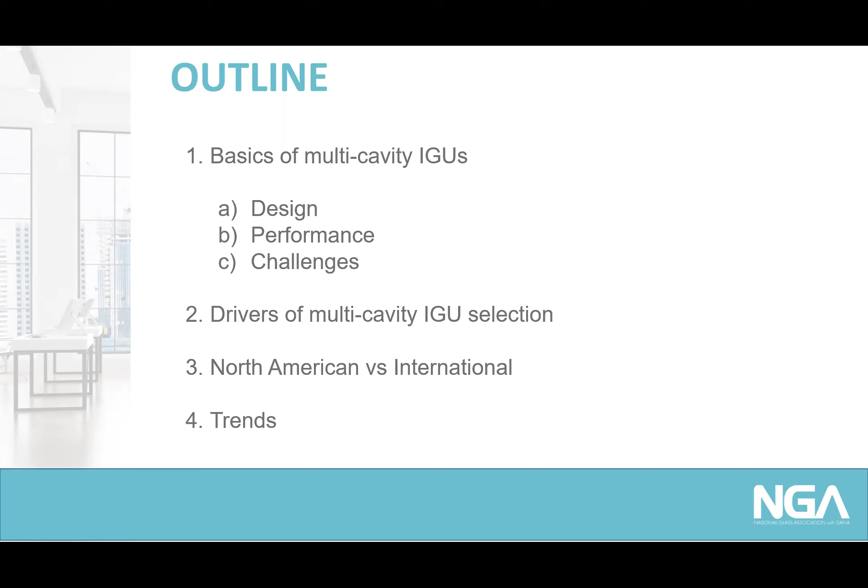Today's webinar topic of multi-cavity glazing is one that is most commonly discussed in residential circles and by those serving the extreme northern climates of the U.S. and Canada. As the codes and regulatory drivers continue to tighten, this topic continues to come up more frequently in our circles, enough so that NGA volunteers and staff have developed an AIA continuing education course dedicated to the topic.

The course is titled Multi-Cavity Insulating Glass Units. We will obviously not be going through the entire one-hour presentation during this session today, but I will touch on some of the key points related to the benefits of and the considerations for using multi-cavity glazing in design. If any architects on the call today are interested in this full AIA continuing education session, please contact Sarah or the NGA office for more details on how to register.

So let's get started with a few basics. Multi-cavity insulating glass units refers to the insulating unit with more than one air space. In today's market, that could end up being a triple pane or even quads in some cases.

The added layers of airspace lend themselves towards greater energy efficiency and improved U-factor and overall performance of the window. Multi-cavity units are already being used widely in Europe and are making their way into North America, becoming more prominent. While there's still a very small percentage, we are seeing that trend grow.

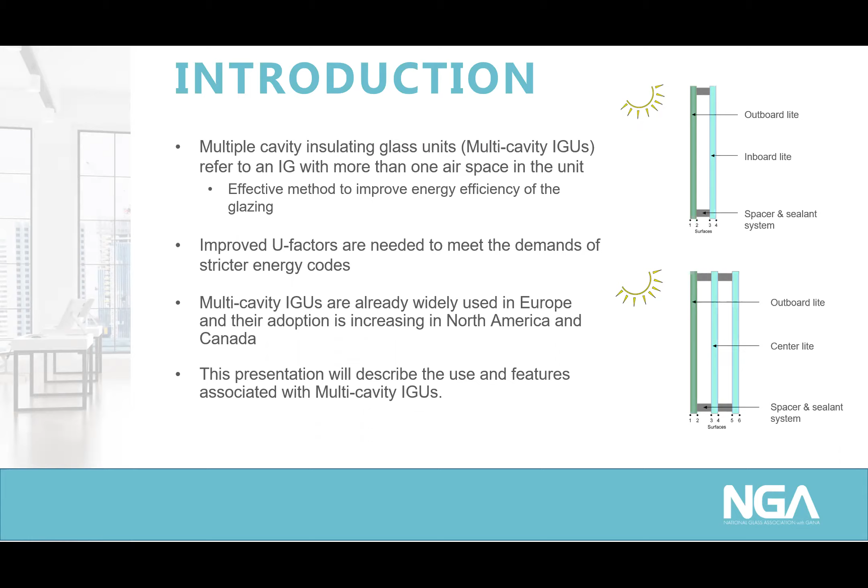U-factor reduction requirements are the biggest driver for considering high-performance options like multi-cavity, but keeping it cost-effective and practical requires taking a closer look at the design itself. So let's take a look at a few design elements that we must consider when designing with multi-cavity IGU, and their differences from traditional double-glazed insulating glass units.

The first one we'll look at is the spacer system design. Like double glazing units, multi-cavity glazing will typically feature a single spacer for each one of the cavities. The use of a grooved single spacer to support the center lite can also be used. In some instances, a suspended film may also be used in place of a center glass lite.

Whether we're talking about doubles, triples, or quads, for multi-cavity glazing, the purposes for these cavities or spacer systems include the removal of moisture from the cavity, preventing moisture from entering the airspace, and retaining the gas fill within that cavity. What we have represented here on the screen is just a couple of different configurations.

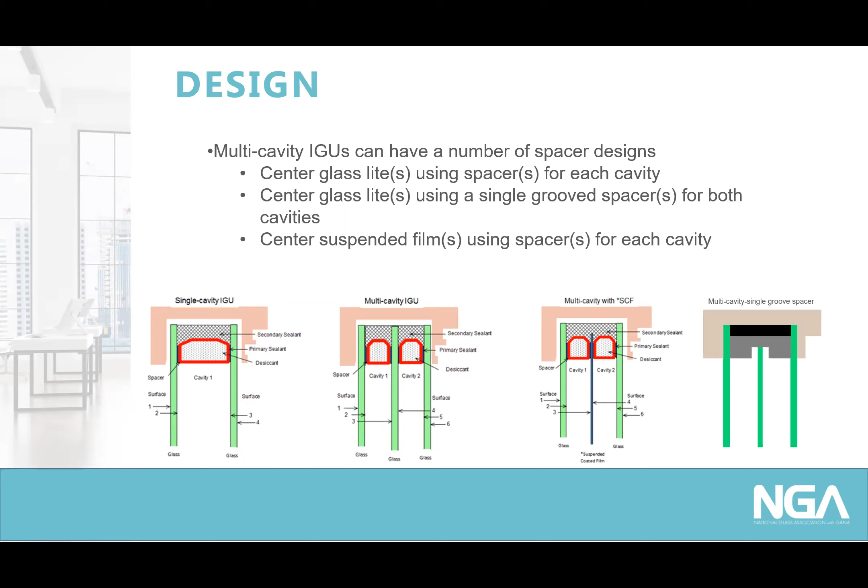There are obviously more options out there, but this gives you a general perspective, similar to the presentation available in the full AIA course.

When we talk about spacer design, this course discusses two general categories: the rigid spacer type and the flexible spacer type. With both of these, the product contains desiccant that is necessary to draw out airspace moisture that can get trapped during manufacturing, and also for long-term performance. It's important to note that as U-factor reduction requirements continue to get more stringent, there is an increased use of warm edge versions of both of these types of spacers.

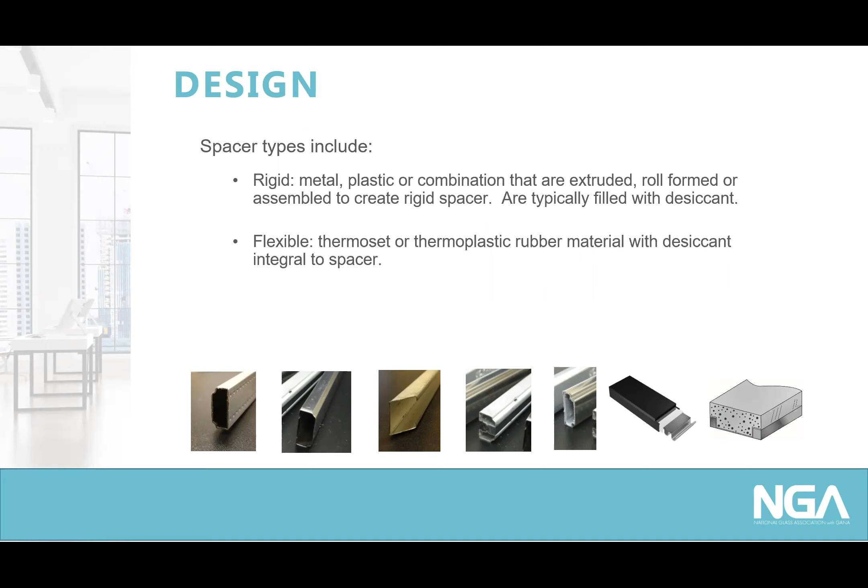The second component we'll look at, very important, is the glass. Low E coatings are part of the glazing and glass, and these coatings are quite important when it comes to design considerations, especially as we look into multi-cavity. The coatings are applied to the glass lites of the IGU to improve the overall U factor and help with solar heat gain and control the solar portion of the system.

Positioning of these coatings, or their locations at surface 1 through 5 or 6 within the IGU, can impact the solar performance, the solar heat gain coefficient. Coatings located close to the exterior surface generally result in lower solar heat gain coefficient, while positioning the low E closer to the interior generally results in higher solar heat gain values.

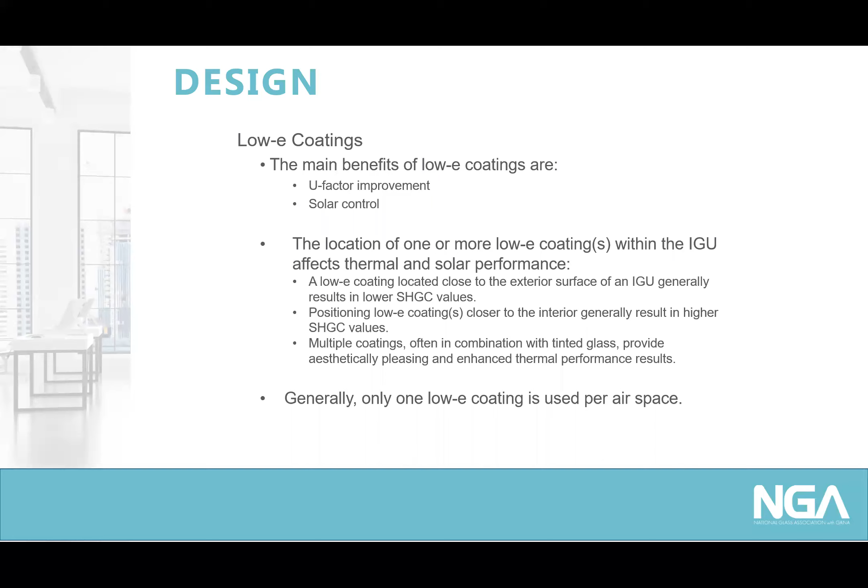Multi-cavity glazing provides added options for low E configurations and orientation of these coatings on these surfaces to meet the desired performance targets. But it's important to note that typically only one low E coating is used per airspace cavity.

From a performance perspective, there are a few attributes we should consider. From a durability perspective, ASTM 2190 is a standard we use in our industry, as most of us are aware, for testing the durability of insulating glass on a traditional double.

When we look at multi-cavity glazing, this durability testing uses the same standard, but it's imperative that we go through all the testing with whatever the configuration is to determine that it still meets the performance requirements of 2190. Having multiple air spaces also typically means you can end up at least doubling the transmission paths, depending on the spacer configuration. So workmanship and those types of things can be a little more complex, and durability can be a bit more challenging.

Durability, thermal factors, and acoustics should all be weighed in when considering the design performance attributes of a multi-cavity IGU. Their overall fabrication is generally more complex, which impacts placement of coatings and potentially an unbalanced IGU gas fill cavity, where you might have a smaller airspace on one side, a larger on the other, using krypton in one cavity and argon in another. So this just creates some additional challenges if we're trying to meet these performance requirements.

But certainly thermal and acoustic benefits are one of the key drivers and reasons for the market considering multi-cavity in the market today, whether residential or architectural.

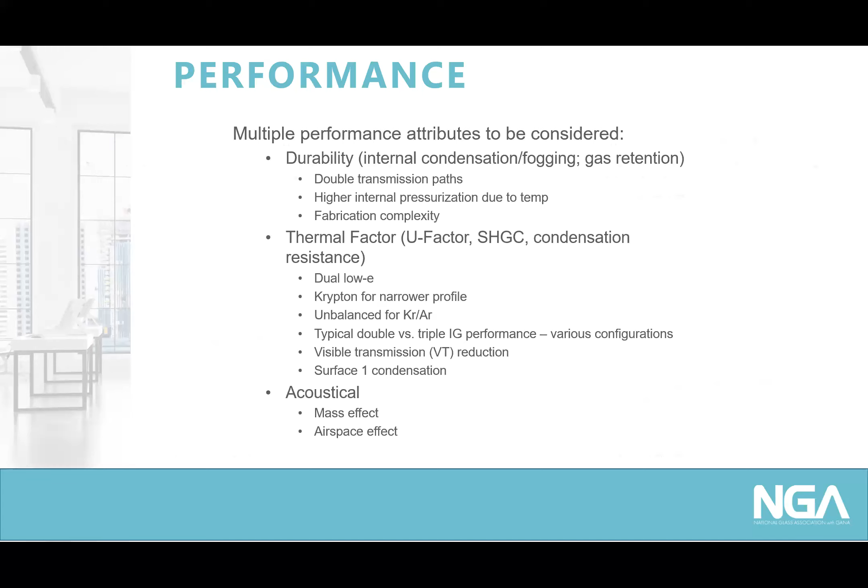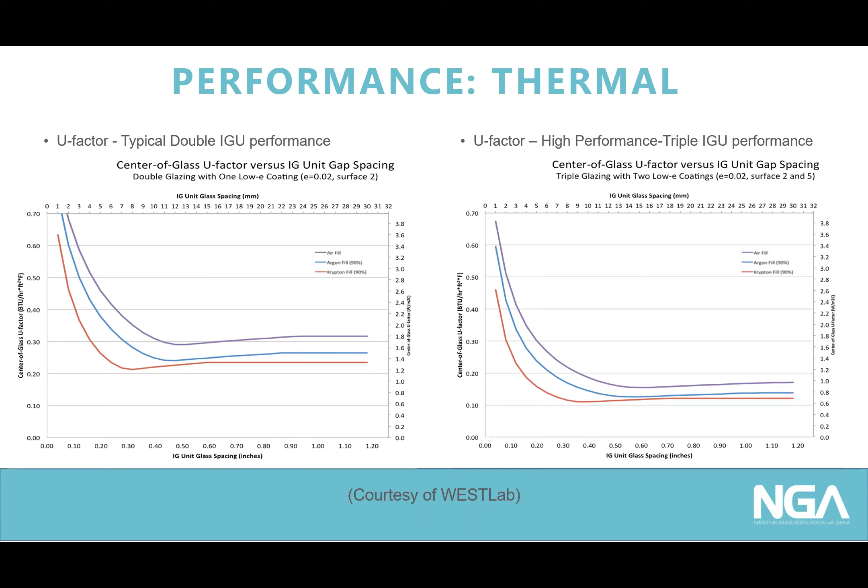For purposes of the presentation today, we can see that triples, or multi-cavity, certainly provide a significant bump in U factor improvement, down to just above 0.1 in this particular case when filling with krypton. So again, a very important aspect of this is thermal and acoustic. This gives you some idea of why multi-cavity design is pretty appealing from a design and performance perspective, especially as architects and building owners are concerned.

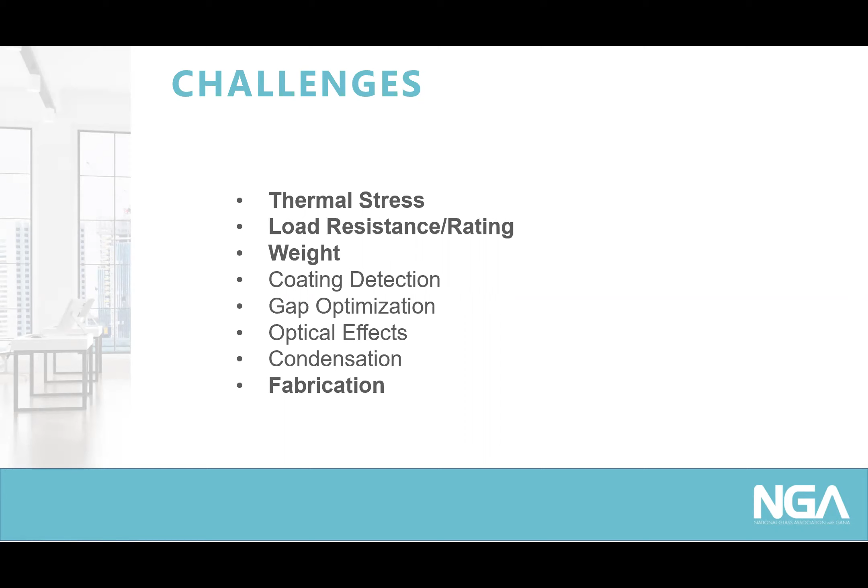The first challenge we'll look at is that of thermal stress. I'd like to start this challenges section by simply stating that for those of us familiar with fabricating and manufacturing traditional dual pane, it's important to note that just because it works for double pane doesn't mean it will work the same way for multi-cavity. This statement could probably be applied across all areas, not just thermal stress.

With multi-cavity design, we talk about the advantages of multiple low-E configurations and the ability to tune to the desired performance when we have multiple surfaces of low-E that we can apply. This may be ideal from a performance and benefits perspective, but it can lead to thermal stress issues, especially for the center lite, which can see additional heat buildup based on the heat and temperature trapped in those extra cavities. To address these concerns, heat strengthening the center lite may be required. This can add additional fabrication time and additional cost that might not have been anticipated otherwise. Make sure you work with your glass supplier to gain assistance in designing in this area.

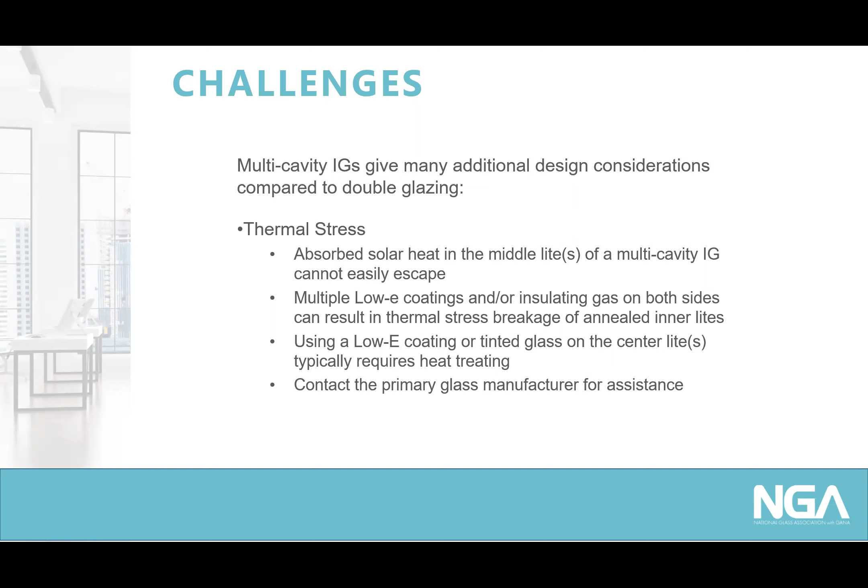Multi-cavity glazing can also have greater glass stress and edge seal pressure stresses due to the increased temperatures within each of these cavities. This could impact glass selection and also the sealant bite required to handle these additional stresses. Failure to research this, or assuming that what worked for a double will automatically work for a triple, could end up causing issues with system design and long-term field performance. Make sure you're doing your research, contacting your glass professional and design professionals, to ensure these systems are engineered to handle the increased stresses.

Another well-known challenge from a multi-cavity perspective is that of extra weight. The additional lite of glass or components making up that multi-cavity glazing in a finished unit can have an impact on everyone in the supply chain who touches the glass, from the glass fabricator to the window fabricator to the installer. This weight must be considered from a window design perspective as well, including upgrading the hardware to handle the additional weight, and taking into consideration proper reinforcements and wall thicknesses within the framing.

This challenge of weight is one of the key drivers behind why we're hearing a lot of talk today about thin glass triples, where we're looking at typical glass thickness for the exterior for load resistance, but a center lite that's much thinner, which helps reduce the weight while giving us increased thermal performance. A lot more to learn, and a lot more coming on thin glass triples, but we'll leave it at that for today.

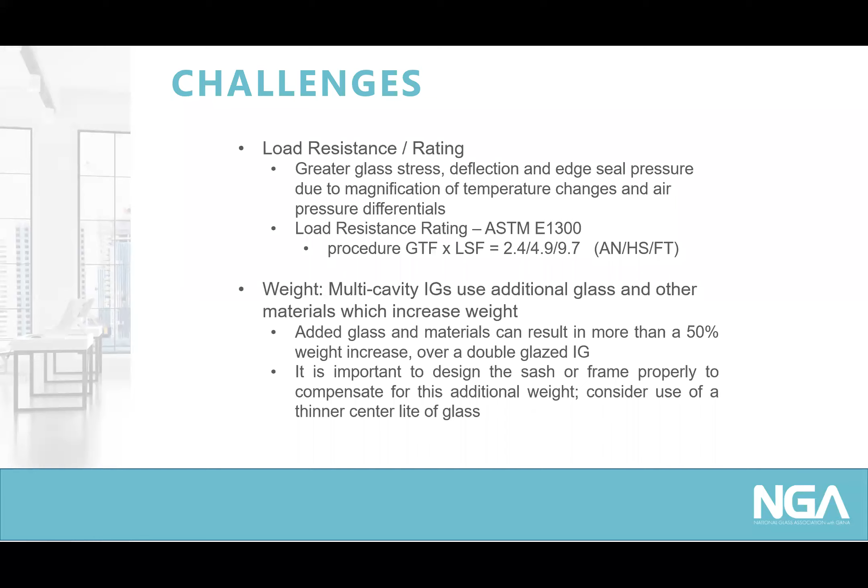Finally, we'll take a look at the fabrication challenges. Our current labor issues are only exacerbated by the fabrication and installation challenges that triples potentially bring to the market. Current double glazing fabrication equipment may limit some of the multi-cavity configurations or reduce the efficiencies of plant production when we jump from double pane to triple pane. But automation can help in some of these cases.

A case in point of ways this could slow things down is switching from argon fill to krypton fill for those narrower spaces, or the extra handling of additional low-E coatings. With the orientation required for those performance attributes, you may have surfaces now facing rollers or caster tables that could end up creating scratching or handling issues. All these are challenges we must consider when looking at the performance benefit of multi-cavity glazing, balancing that with the cost effectiveness and efficiencies of producing these units in our factory.

But as I mentioned, double glazing, and even multi-cavity, can alleviate some of this by automating some of the processes, reducing some of those touch points. From an installation and glazing perspective, installing and glazing these units, whether double or triple, is a key factor in the long-term durability and performance of insulating glass units. Installed incorrectly, even the best units will end up having trouble in the field. With multi-cavity, this is no exception.

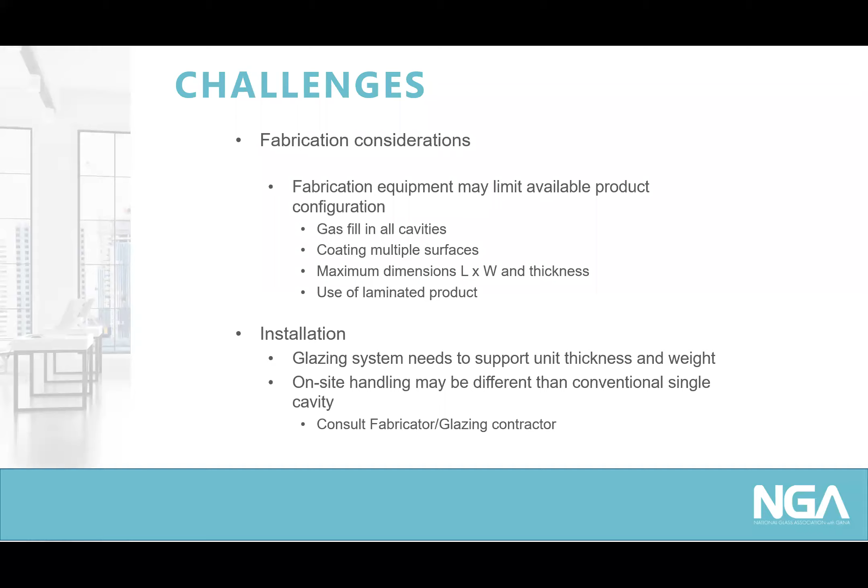Let's take a look at some of the drivers and trends of energy efficiency, and what is causing us to discuss triples more prevalently today than maybe we have in the last 5 to 10 years.

You can't watch any of the industry's news and headlines in the past year without hearing about some of these drivers—whether it's the California Energy Commission's latest discussions on multi-cavity thin glass triples, skinny triples, or Title 24 and their stringency for U-value requirements, the Green New Deal, Passive House, Energy Star, or Net Zero Energy. There's a steady stream and push of these drivers asking our industry to provide better overall performing products.

To address the envelope and help save energy, reduce energy consumption, we know facades and buildings play a significant role, and it's important we stay ahead of that. As building codes, Energy Star, Passive House, and the economics of it all continue to push us to improve, we've got to find ways to bring products to market that will perform.

For anyone who has seen Tom Culp's presentations at BEC or other NGA events, and even his most recent webinar, these next few slides on these drivers will be very familiar. I won't cover them nearly as well as Tom can—he's our industry expert on codes and standards and where we're heading. But for purposes of understanding these drivers, I wanted to highlight a couple of slides from his presentation to reinforce that we're being driven to find better ways of providing high-performance products at a cost-effective price point.

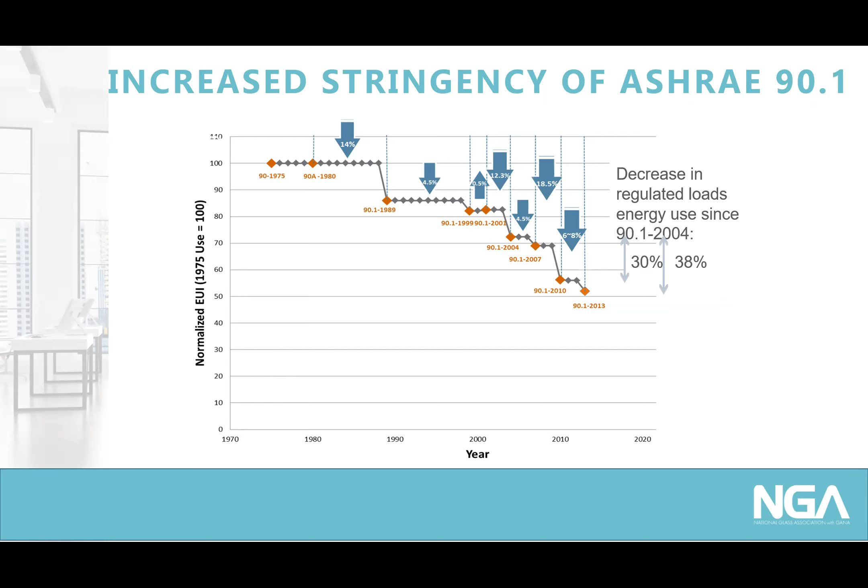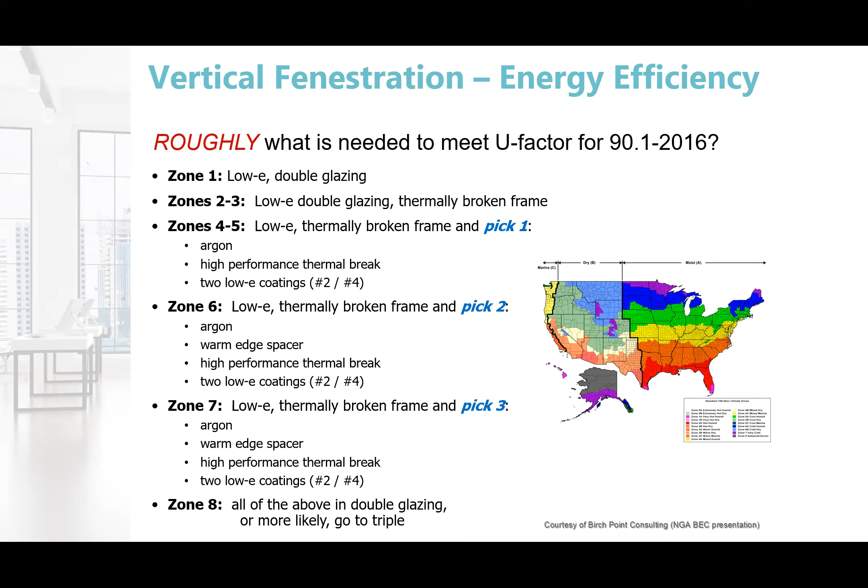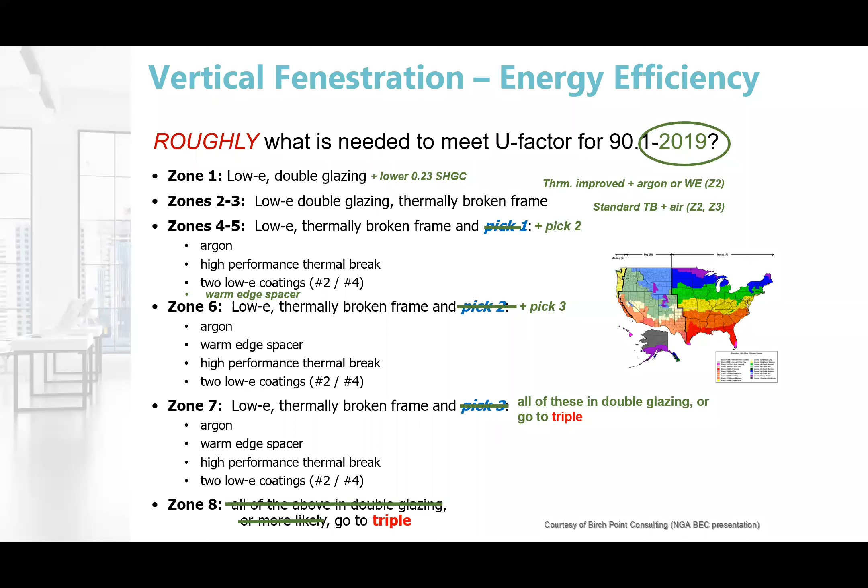In zone 8, the extreme northern climates, you're adding all of those components, or more likely moving to triples. But we're not at version 2016 anymore—we're already looking at 2019 and beyond. Under the 2019 requirements, you're basically shifting up one zone: what was required in zone 6 is now required in zones 4 and 5, and so on. So multi-cavity or triple glazing, once only needed in zone 8, is now likely needed in zone 7, meaning zones 6 or even 4 and 5 might see increased usage of these components rather than just adding the other attributes listed.

Looking beyond that, ASHRAE 90.1 2019 and the 2021 IECC will continue to push for improved framing, warm edge spacers, argon gas fillings, and fourth-surface low-E. But the key caveat is that while it will continue to push, it's also asking our industry to find practical and cost-effective ways to deliver these solutions to the marketplace.

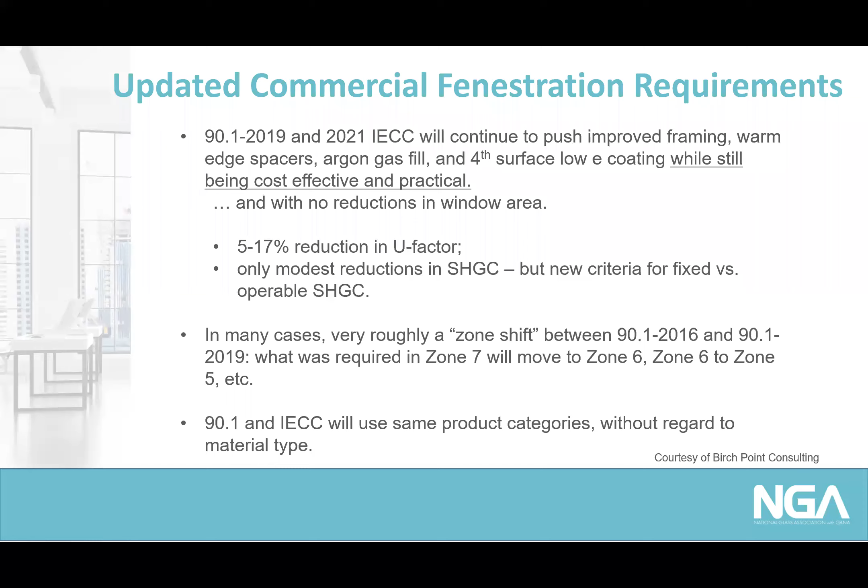We know that the North American market has not adopted triple or multi-cavity glazing like many other markets. I'd like to spend a few minutes looking at the European markets and some of our international markets, and look at trends we can learn from. Maybe we're moving that way, maybe not, maybe we still have a lot of life left with standard dual panes. I wanted to share some research I did with colleagues from our international community to get a feel for what Europe and other markets are doing to address energy requirements.

So looking at the European market, these are best guesstimates on my part based on the data I collected. Roughly 66% of the European market on average is already incorporating triple pane into their design. If you look at just the Germanic regions, the lower portion of Europe, that number actually goes up to three-quarters of the market using triple panes.

Looking at the international climate map, we see the climate zones are fairly similar to the U.S. - warmer southern and cooler or cold northern regions - yet there's a tremendous difference in the percentage of triples used in that region. The northern climates generally use a higher percentage, but even in the lower regions, one interesting stat is that warm edge makes up nearly all of the triples produced in Europe. Warm edge is used in all of those applications. As a whole, Europe is roughly 40% of the market using some version of warm edge technology, rigid or flexible. That's a big difference compared to the single-digit triple glazing or multi-cavity usage we have, based on the Ducker information we've seen.

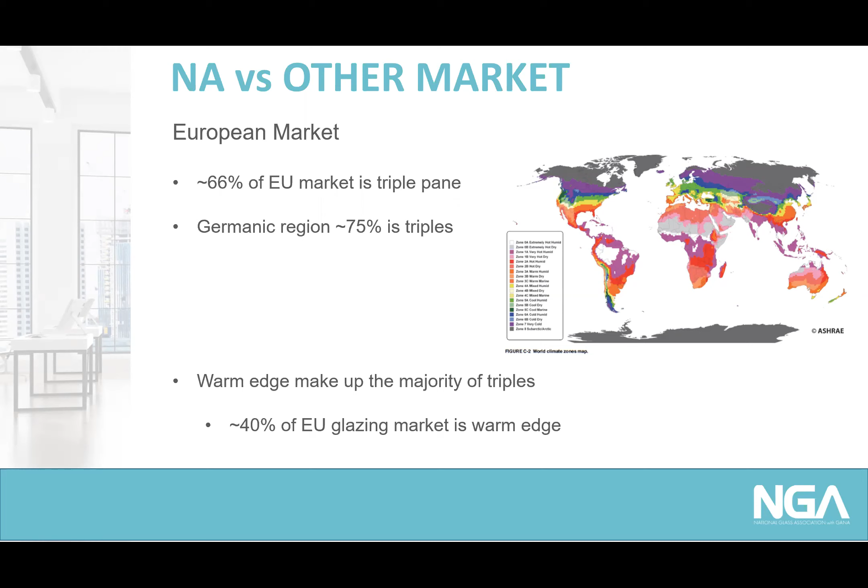Looking at another international market, the UK: while they certainly use more triples than we do here in North America, it's significantly less than Europe overall. Their climate is a bit more moderate, with less extremes of cold and hot, and only 10 to 15% use triples, mostly in the residential market from what I could gather. What I also found is that the primary drivers for triples in that market were acoustics - being able to decouple, having wider air spaces, things that deaden sound. Maybe that's based on population density or other drivers, but I found it an interesting piece of information.

What I did hear is that the majority of manufacturers are using warm edge, argon, low E, and high performance framing to meet codes versus just going straight to triples. So it's a bit more of a holistic approach, using high performance, even composite framing materials as a standard, versus going straight to triples.

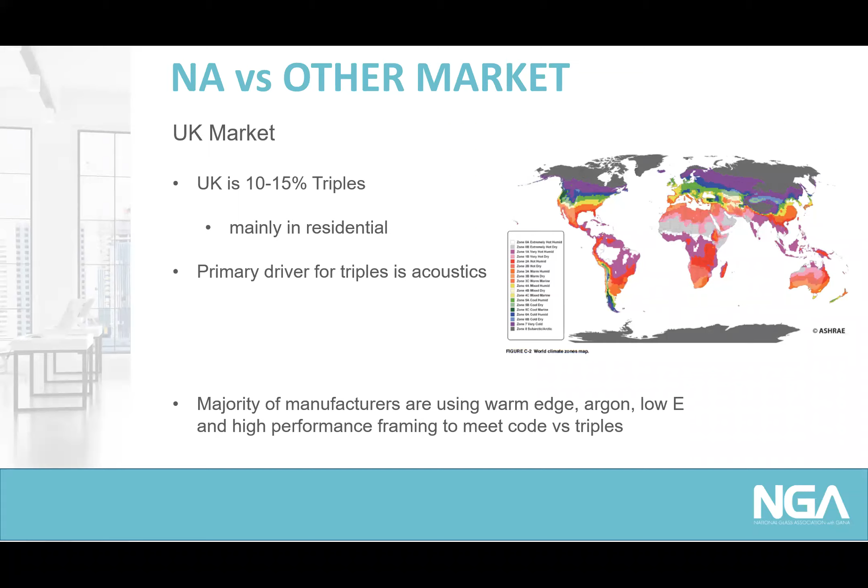So those were two of the areas I looked at. I asked a few other questions from a manufacturing perspective - what might be some of the drivers for more triples there versus what we're doing here, and are some of those trends coming our way? What I found interesting is the approach to manufacturing.

If you remember, under the challenges section, we talked about the production challenges of multi-cavity and how current labor issues are only adding to those challenges. Well, in the EU, labor and energy costs and challenges have been a driver in that market for quite some time. That market is quite invested in automation across the board, regardless of spacer types - there's a lot more automation. We see that even in smaller and medium-sized fabricators, not just the larger ones. So whether you're producing 100 IG units a day or 1,000 IG units per day, automation in Europe tends to be a consideration, driven by consistency, higher quality, and the fact that automation lends itself to manufacturing multi-cavity more easily.

In the US, though, we have only seen these types of automation investments typically with the larger fabricators. But as we see the drivers for more energy efficiency and continued labor challenges like in the EU, maybe we'll start seeing a greater shift towards investments in processing, technology, and automation to include medium and smaller fabricators, as well as a shift toward more multi-cavity, which can be simplified through automation.

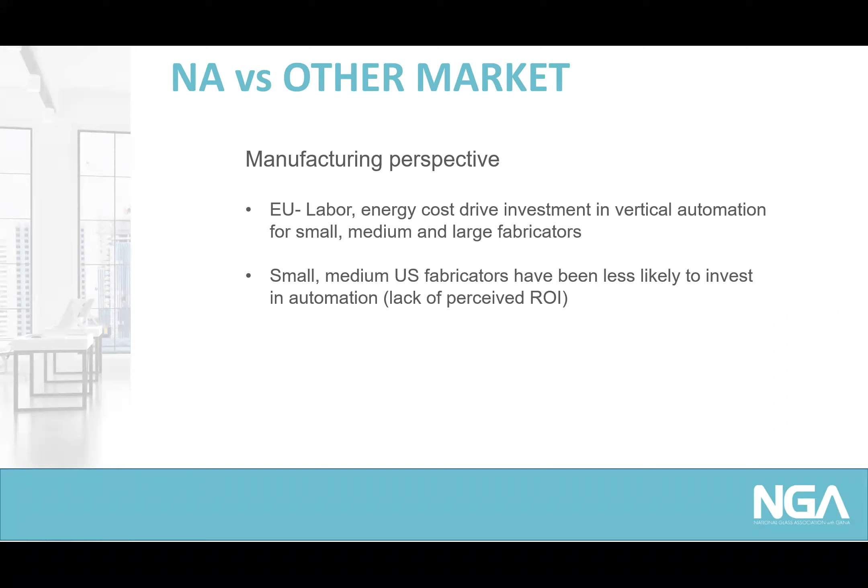And finally, I'd like to wrap up with just a quick slide on some of the latest buzz, the latest trends, as you might say it. Codes and other drivers will continue to push the construction industry and our fenestration industry to innovate. It's the reason that we're hearing a lot about the multi-cavity design that we're talking about today. It's about the fact that we're hearing a lot about skinny triples, where we're taking that center light and trying to thin it down as much as we can to reduce weight while giving it maximum thermal performance.

Can we coat those center lights? Can we heat strengthen those center lights? How do we handle that glass? Those are all challenges that we're wrestling with now, but there's a lot of discussion around skinny triples and the great thermal performance that it can provide.

Is it that we're going to maybe continue to hear more and more about VIG and hybrid VIG and how these technologies might come to bear? It's why we are also seeing greater emphasis on full automation in our fabrication and production processes to drive overall costs down while we're driving higher and higher performing technology. It's why new framing materials and thermal break designs are being introduced to the architectural market.

So if these new and latest things like skinny triples and high performance VIG and hybrid VIG and automation and new framing, are they going to be the next big thing? Will it be the new technology of the future? Time is only going to tell.

You know, it's a bit of humor here, but take a look at this slide. That's right, dear, our ancestors had tails. It wasn't that long ago we had phones that were connected to cords, and now we're dealing with wireless, we're dealing with cell phones. So, is vacuum insulating glass going to be the future?

Are skinny triples going to be the future? Is new framing material going to be the future? Time will tell, but let's make sure that we keep an open mind to these ideas. Let's make sure that we vet them thoroughly to make sure that whatever it is that we bring to market as the next great big thing, much like our low-E coatings and our argon gas filling were thought to be these futuristic products just 10 years ago in the architectural arena, now our mainstay and everything we produce. Maybe skinny triples and hybrid VIGs or these framing will be that future.

The key is we've got to vet them out and make sure that these products are tested to perform in the field as they need to perform, so that our glass industry, the fenestration industry, will continue to use glass as the material of choice for our facades versus other materials taking away from the wall and becoming the predominant material versus glass.

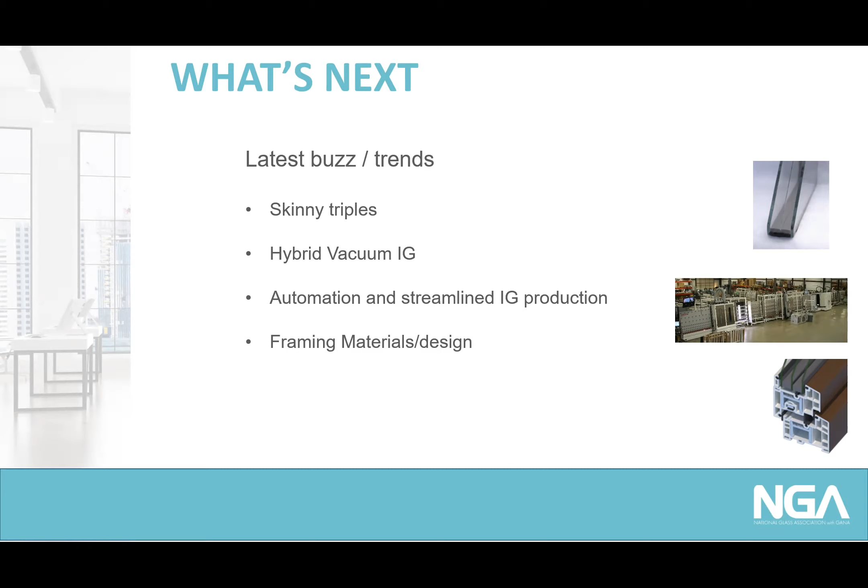And I can just tell you that with the upcoming events that we have with Glass Build just around the corner, I can't think of a better place that we can continue this conversation and see where some of these technologies are going, to take a look at some of the automation that will be on display there, some of the new products and innovation like skinny triples that will be there, the hybrid VIGs or VIGs, and new framing materials. They'll all be at Glass Build next month, and I'd encourage you to make the trip to Atlanta if you're not already planning to be there.

I'll be there for 3 days, working at Quanex's booth, presenting on a topic of automation at the NGA's Express Learning Pavilion on Tuesday, and walking the show floor, trying to understand where our industry is going and how we can all contribute to make it one of the greatest industries for providing products to the envelope.

I hope to see you there, and I hope we can continue the conversation on how innovation and opportunities are there for us in the glass and glazing industry. With that, Sarah, I'll turn it back over to you.